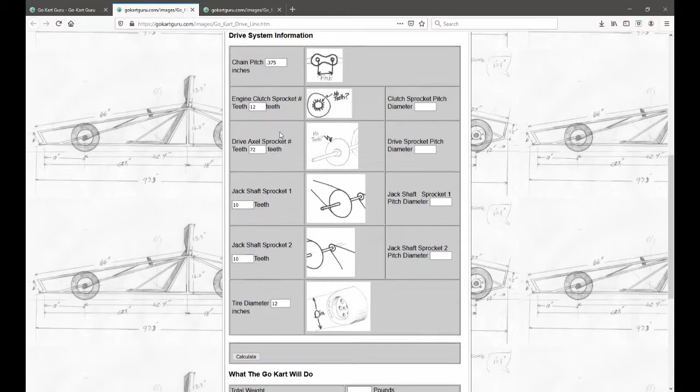If you want a quick rundown on how to do that, just go down to the calculate button, press calculate, and you'll see what it can do in a normal operation.

It will tell you what you can do to change the drive system. One thing of note here is it's a 6-to-1 ratio drive - there's a 12-tooth clutch and a 72-tooth rear sprocket, that's what's set up on this go-kart. The jack drive is basically nulled out because both are the same size. The tire diameter is 12 inches and so forth.

This go-kart is set up to be 160 pounds for the frame, 165 pounds for the person, 5 horsepower at 5,000 RPM max, but it's 3,600 RPM when the 5 horsepower kicks in, and actual clutch engagement is at 2,200. The reason that's important is if you graph the 5 horsepower motor, you'll see it's actually less than 5 horsepower at 2,200 RPM, and it takes that into account.

This one has a hill angle of 10 degrees. We can null that out as well and it'll give you just a straight line calculation. Basically everything is good, and it will go for a top speed of about 30 miles an hour.

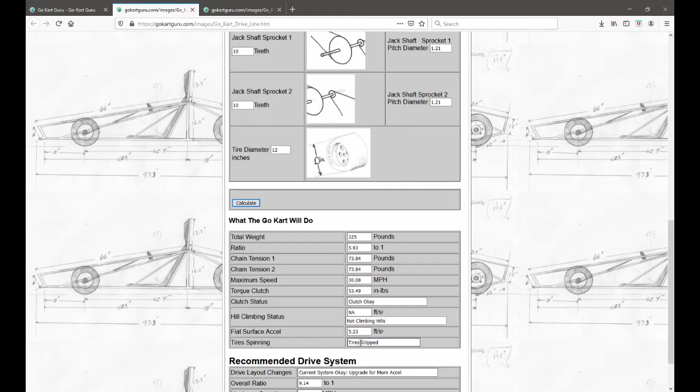Flat surface acceleration is 5.23. Let's see, there's some other data here. It used to have an old program of 0 to 60, but that was kind of silly, so we took that out. So basically it tells you what kind of acceleration you have. Just to give you an idea, 32 feet per second is 1 G, and typically the only way you can get that is with 4-wheel drive, and what we have here is about a fourth of that. So that's how this program works.

We'll get back into it with some more advanced calculations. This program is standard on the web page, so if you want to play around with it, go ahead. But it also comes with our driveline program that we offer as well.

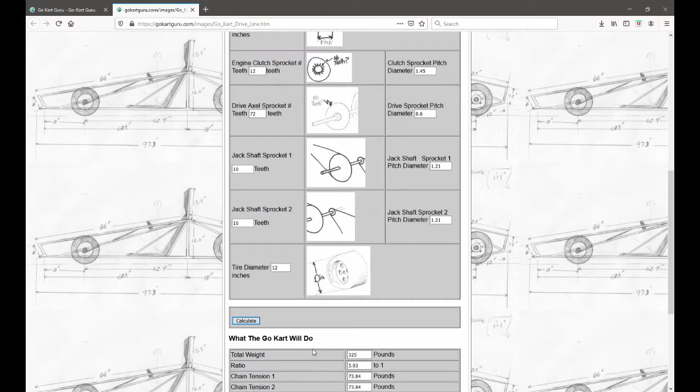So now we're going to play around with the program and see what we can do to make changes. Down below it has some recommended drive system changes, and I just want you to understand there are trade-offs. What happens here is the current system's okay, but you can upgrade for more acceleration is what it's telling you, and it's giving you a suggestion.

The suggestion is to upgrade the ratio to 9.14 to 1. You see the maximum speed is 19.5 miles per hour, but it does increase flat surface acceleration. So we're going to do that - we're going to play around with cranking it up to 9.14. So how will we do that?

Well, you see you have a 5.93 to 1 ratio, so we can go up here and play around with the ratio. Now keep in mind this is not realistic, because look at the diameter of the sprocket here - it's 8.6, and the diameter of our wheel is 12. But from a calculation standpoint, it doesn't care, so we're going to do that anyway.

We're going to do a calculate, run it. And you see now it's the same exact diameter as the wheel, so what do we get - we got 8.24 to 1 ratio. So we're going to just keep cranking it up until we get that ratio that was suggested below, which was 9 essentially. So we'll calculate it - so we're at 9.89.

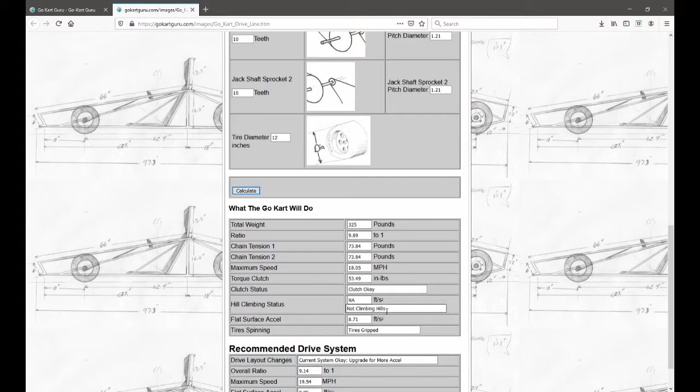And what you're seeing here is that the clutch is okay. There was flat surface acceleration - the tires gripped, so it's not slipping. And we got our miles per hour around 18, which isn't fantastic. But basically what that's showing you is that with this ratio, you would get that acceleration.

Okay, that being said, what can we do to do an equivalency with a jack drive? So here's what you do - you might have to do some math in your head, but I'm not real great with math in my head. So what you're looking at here is the big sprocket - that's what this is showing here.

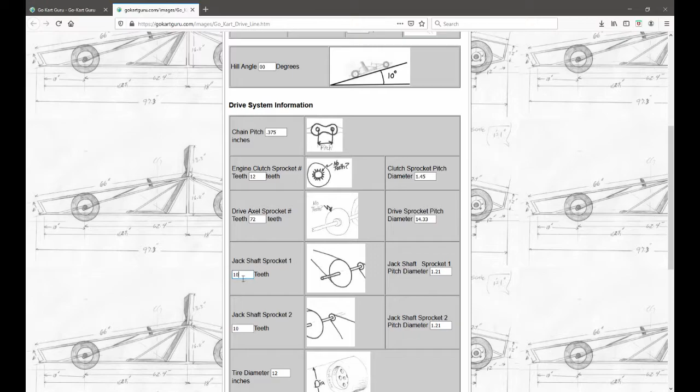The big sprocket was small, and this is the jack shaft drive sprocket right here. So what we're going to do is basically have this jumping to here, and then this one jumping to the back axle. So with our jack drive, we're going to put 30 teeth in here, and leave this one at 10, and see what happens. So we calculate, and you can see our ratio is immense.

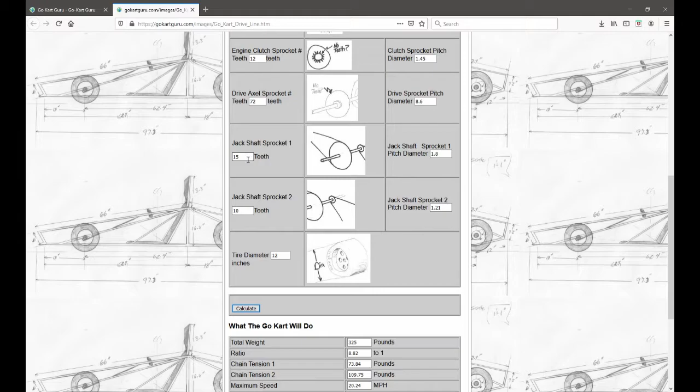It went to 17.54, so we went a little overboard with our jack drive. We're going to drop it down to 20, calculate. Now it's 11.72, still pretty steep. We're going to go 15, calculate. We're at 8.82, which is closer to that 9. So we'll bump it up a little higher, 16, calculate, and it's 9.4.

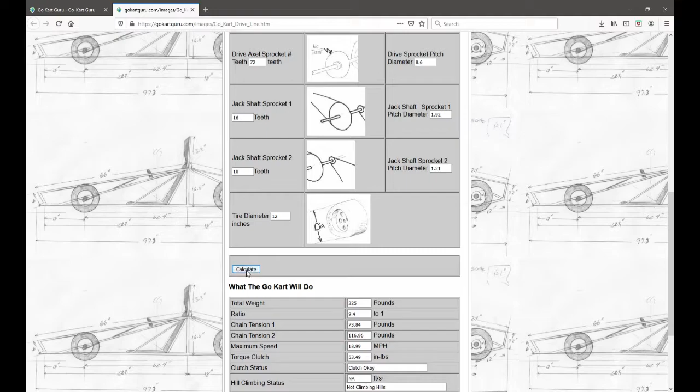All right, let's see what our calculation is. The tires gripped, we have our acceleration, we're closer to what it was recommending, a 9.14. I believe 9.14 is a magic number of a quarter a G. So that's the basic way you play with the jack drive. When we come back, we're going to play around with horsepower and see what that does to the program.

Okay, you may have been playing around with this program and wondering why it says tires gripped or tires slipped, and how that works. Well, remember, 1g acceleration is 32.2 feet per second squared, and half of that is approximately 15 point whatever we have here.

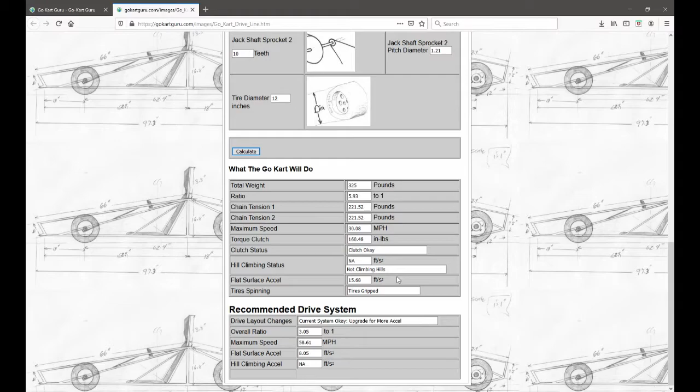The way that works is it assumes the go-kart has a 50-50 weight distribution, and that you have a live axle in the back so both rear wheels are spinning. So the best you're going to get with a 50-50 weight distribution is half of it gripping the ground, so you're only going to get half G. That's what it's basically telling you.

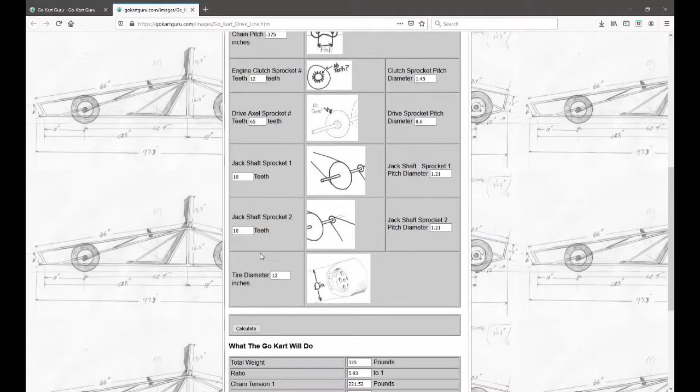Also, a side note: even though you cranked up the horsepower, the maximum speed you're going to get out of this go-kart setup is 30.08. So the only way to get this thing to go faster is to change the ratio. Let's change it to 65 and calculate, and you'll see you go 33 and the tires gripped. It dropped your acceleration though, so you can up the horsepower.

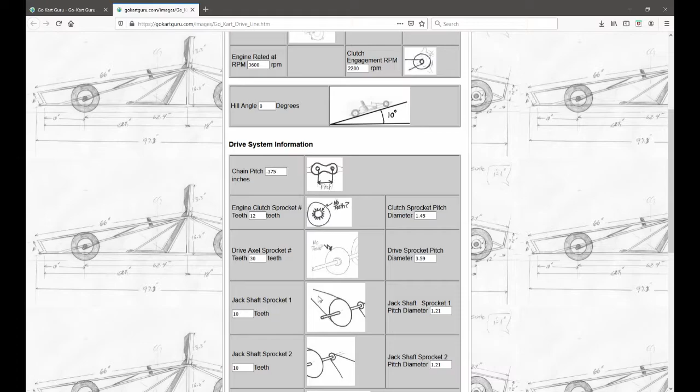Okay, welcome back to the Go-Kart Performance Program. We are going to be playing around with horsepower now to see what happens in the program for acceleration. So we've nulled out the jack drive and made it straight, and basically we're playing with what a horsepower increase will do. I found just driving the go-kart itself that around 8 horsepower is actually a nice sweet spot for acceleration.

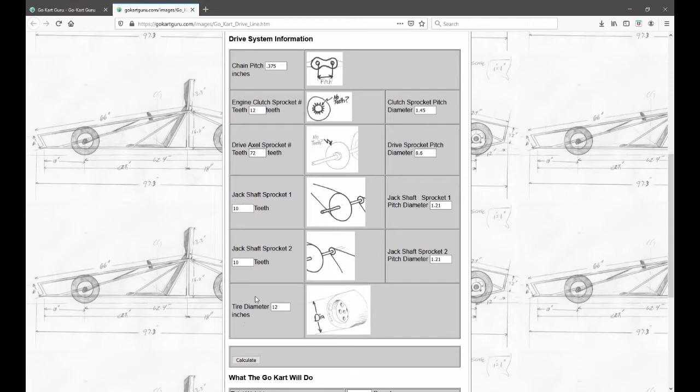So we'll see what that does in the program here. It bumped it up to 9.93 feet per second, and it's telling us the tire's gripped, and our max speed is 30 miles per hour. That's what it's suggesting. If you want to bump it up, it's 30 miles per hour here. Or it's actually suggesting to drop the ratio to 4.81. I guess that would just give you a higher top end.

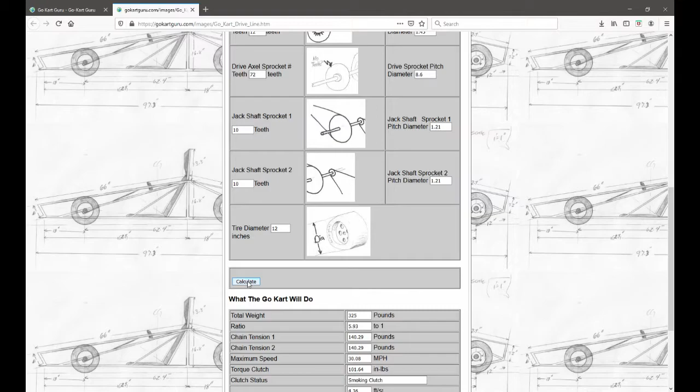Here's the issue if you do that: if you play around with that ratio and want to climb a hill, suddenly it's not so fantastic. The clutch is smoking, and it will climb the hills but slowly. What that's telling you is your ratio is too steep. That's where the variable speed drive belt drives come into place - they drop down in ratio to like 19:1 for climbing hills, kind of like putting in grandma gear, and then it can handle it. When you get to a regular operating RPM, it will raise the ratio to something like this here.

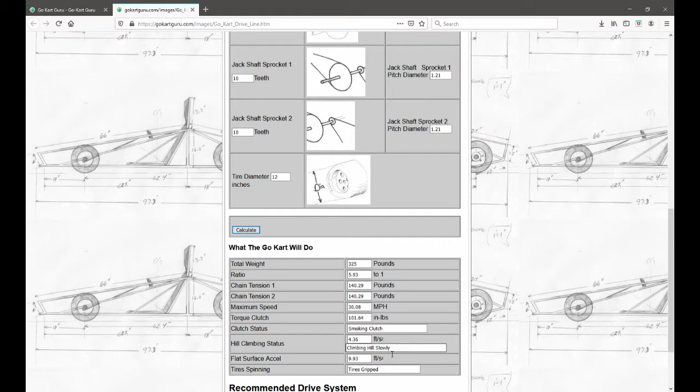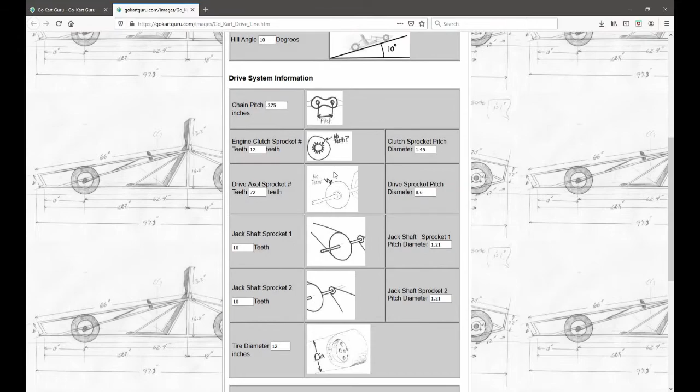So what you're seeing here is that there's an optimum ratio. It will climb a hill, but it'll climb it slowly. That's kind of what we deal with on our go-kart - we actually have a racing engine on it, about 9.5 horsepower, and if you get to a hill, it can smoke the clutch. Our driveway at the worst spot is around 10 degrees, so that's why I use this number. It will climb the hills, but slowly. If you're trying to start from a dead stop, you pretty much have to be doing a rolling run for it to actually work.

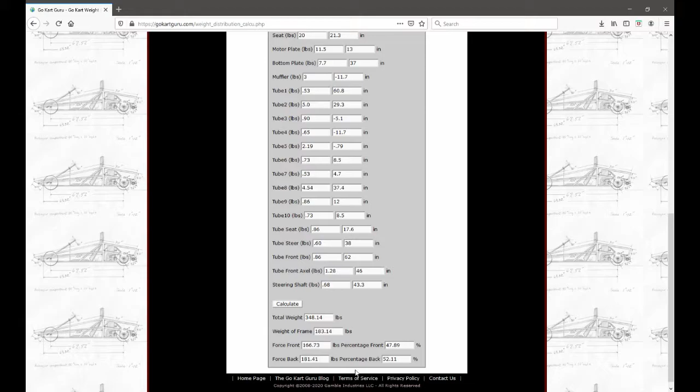So the way the go-kart is set up is we're a little lighter in the front. We're close to 50-50 weight distribution with somebody who weighs 165. So let's actually put in somebody who weighs a little bit heavier, see what that does.

So the percentage on the back is increased a little bit. See that? So let's throw in someone who weighs even more. Let's put 250 in there and see what that does.

See what it's done - because of where the person is sitting, it actually makes it more 50-50 weight distribution when you get a heavier person in it. It kind of shoves some of the weight forward, so that's what's going on there. So that's the 50-50 weight distribution calculation.

When we come back, we'll talk about the stress program.